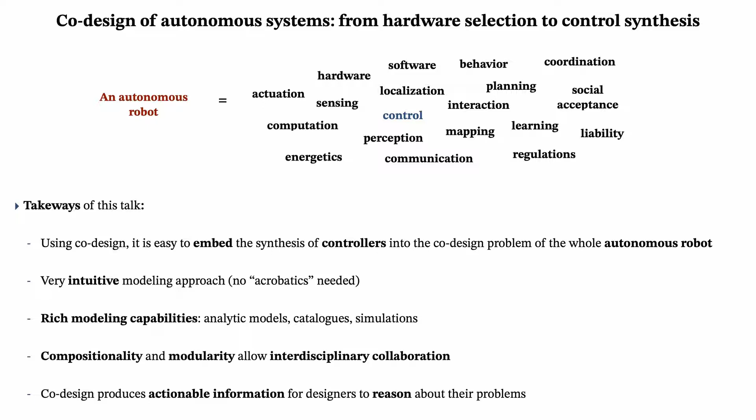Furthermore, the compositionality and modularity of the framework allow interdisciplinary collaboration and provide actionable information for designers to reason about their problems. The proposed approach is based on a monotone theory of co-design, which defines a design problem through three spaces. First, the implementation space, which represents the design choices, the options we have.

Second, the functionality space, which represents our objectives, what we need to achieve. And finally, the requirement space, which describes the resources we need to provide the functionalities. Typically, you can understand functionalities as something you want to maximize, and resources as something you want to minimize. In this framework, we model both spaces as partially ordered sets.

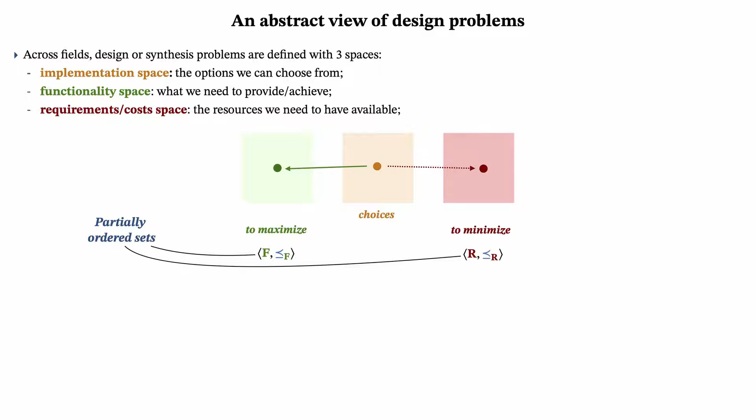Since this is not a common concept, let's first define partially ordered sets. A partially ordered set is a set P together with a partial order, which is defined as a reflexive, transitive, and antisymmetric relation. A typical example of partially ordered sets used in design are total orders. For instance, you might describe your energetic cost with the ordered positive reals, or the number of robots in your fleet with the ordered natural numbers.

However, posets give you a lot more flexibility than total orders. For instance, in this work we will use a partial order on positive semi-definite matrices. Consider two such matrices. First of all, we know that such matrices have real eigenvalues and can be therefore graphically understood as ellipsoids. We can define an order given by ellipsoid inclusion.

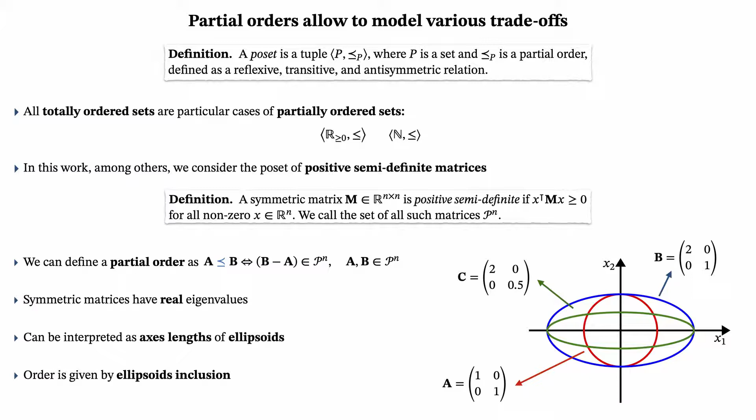A matrix A precedes a matrix B in the partial order if and only if B minus A is again a positive semi-definite matrix. In other words, A precedes B if the ellipsoid representing the matrix B contains the ellipsoid representing the matrix A. Now, given the knowledge of posets, we can formally define design problems with implementation.

These are composed by the functionalities and resources posets, F and R, the implementation space, I, and two maps, prov and req, mapping an implementation to the functionality it provides and the resources it requires. We represent design problems with implementation with the following formal graphical notation. Functionalities are green continuous wires on the left, and resources are dashed red wires on the right.

Implementations are hidden. Think, for instance, about the design problem of a battery. Functionalities are the capacity and the maximal provided current, and resources are the cost and the mass. Implementations, instead, are the different battery models which you can find on the market. Now, for the purpose of design, we need to know how something is done.

However, for the algorithmic solution of co-design problems, we will forget for a moment about implementations and focus on feasibility relations. A feasibility relation is a map from the product of the functionality space with inverted order and resources to bool, the poset containing only the elements false and true.

Each pair of functionalities and resources is mapped to true if there exists an implementation providing at least the requested functionality, requiring at most the proposed resources. This is a monotone map, since lowering the functionalities will not require more resources, and increasing the resources will not provide less functionalities.

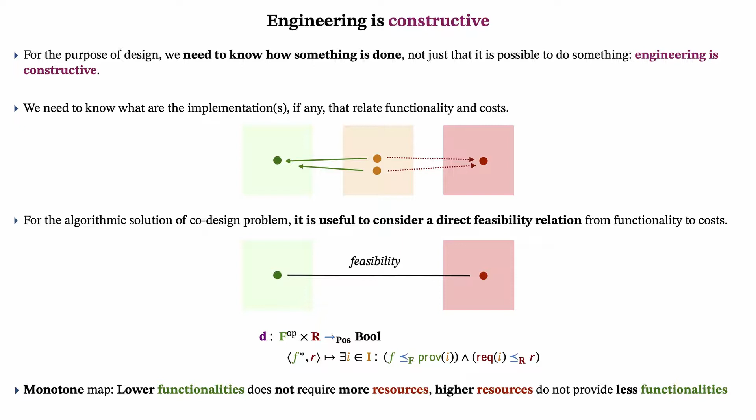The cool thing about feasibility relations is that we can compose them together in many ways. When composing design problems in series, the semantics is that the resources required by a first design problem are provided by a second design problem. Furthermore, we can have design problems in parallel, and we can model feedback when resources are fed back to become functionalities again. Finally, we can choose between two options, or ask two design problems to hold at the same time.

Interestingly, design problems are closed under composition, meaning that any of the mentioned compositions will return a design problem. This is a very useful tool when decomposing large problems into smaller subproblems, and will be very important when co-designing a whole robot. Now, given a composed co-design problem, there are two main queries we want to answer.

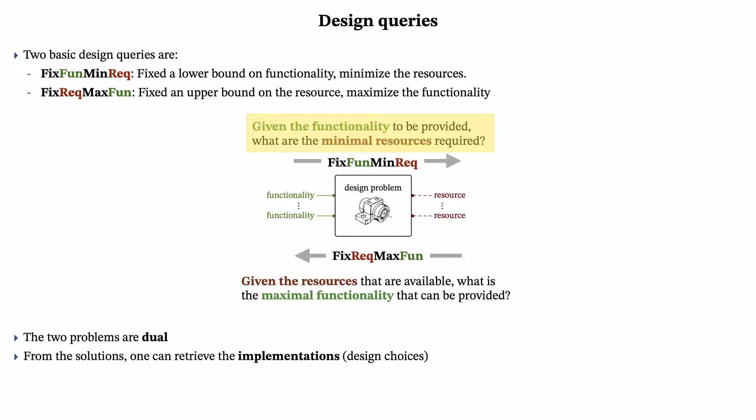First, by fixing the desired functionality, we want to find design choices minimizing the needed resources. Dually, we can fix the resources we can spend and maximize the functionalities we can get. In both cases, we can retrieve the optimal design solutions. We will now focus on the first query.

Technically, we are looking for a map H from the functionality space F to the upper set of feasible resources. Practically, this will be a map from the functionality space to anti-chains of minimal resources.

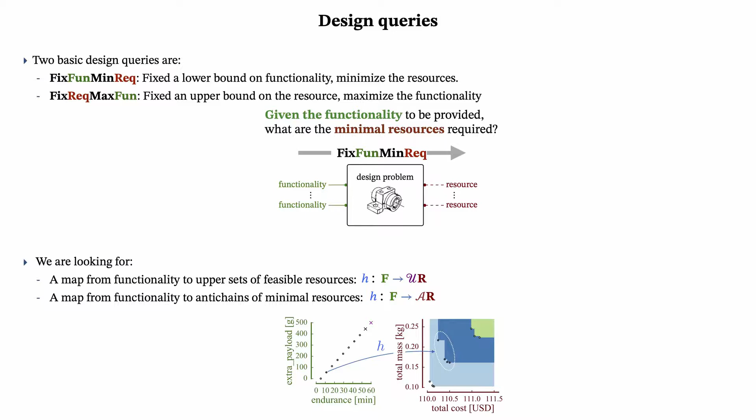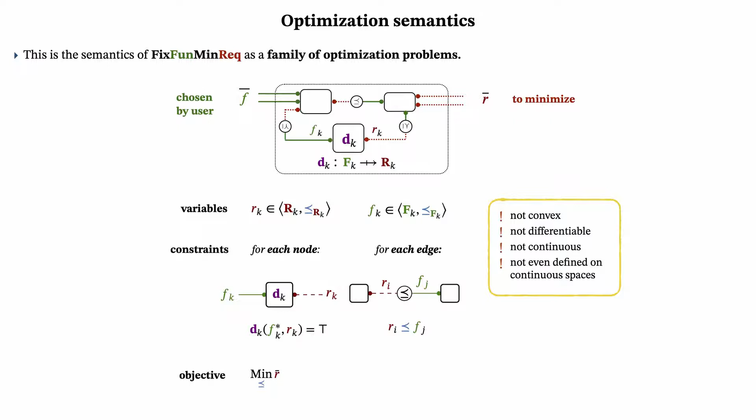We won't go into the details of the optimization, but we want to notice that the described query gives a family of optimization problems in which you have a functionality chosen by the user and you want to minimize the needed resources. Such problems are a particular case of multi-objective optimization problems, which are not convex or differentiable, not continuous, and not even defined on continuous spaces.

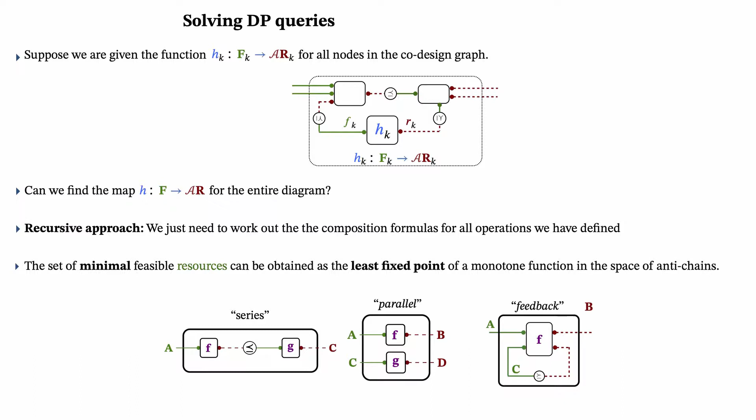Now, given the map H for each design problem composing a bigger co-design problem, we can recursively find a map H for the entire diagram, relying on the different composition operators. The minimal set of resources can be obtained as a least fixed point of a monotone map in the space of anti-chains. The introduced tools are now useful to describe the main result of this work.

In this complex diagram, you find the co-design problem of an autonomous robot. The formulation provided in this work allows us to include the design of a controller, which you see on the left, into the design problem of the whole system.

We instantiate the reasoning for the case of LQG control and provide modeling results for both the continuous and the discrete time cases. For the continuous time case, we consider standard stochastic dynamics with Brownian processes on the system and on the observations. We consider the classic infinite horizon LQG problem and recall the optimal control law, relying on the solution of two Riccati equations, one for the control and one for the estimation.

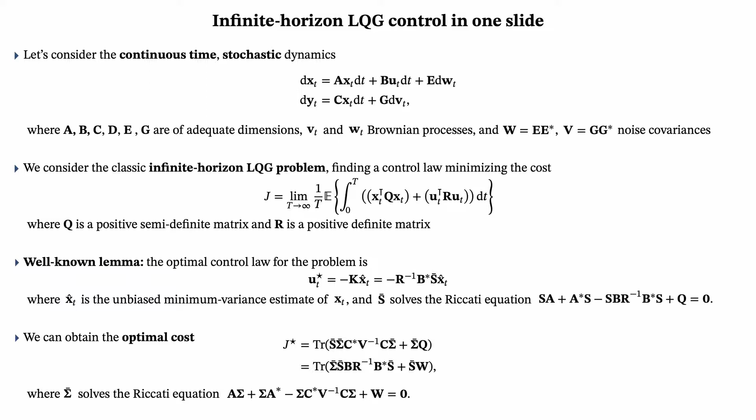Now, how is this useful to think about the control problem as a design problem? First, we split the usual LQG performance metrics describing tracking error and control effort. We call the new metrics p_track and p_effort.

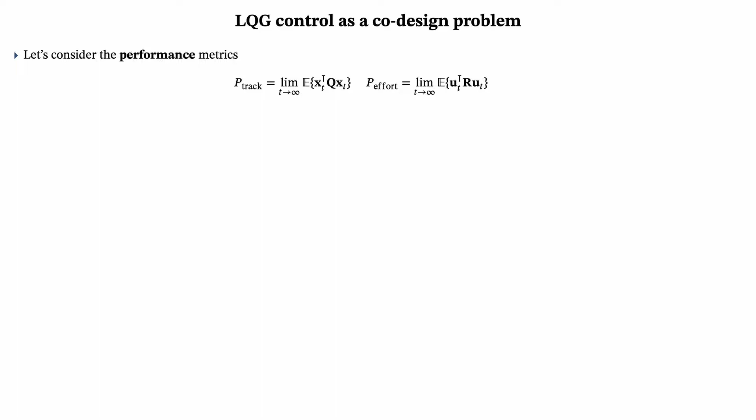Given this separation, we are now ready to state the first result of this work, which simply says that we can write the LQG problem as a design problem with observation noise and system noise as functionalities and tracking error and control effort as resources.

The monotone relation between the two is intuitive, and you can see this from the figure on the right. Being robust to higher observation and system noises will require equal or higher tracking error and control effort. We can prove this formally in 4 steps, using the partial order on matrices defined before.

First, we rewrite the performance metrics in explicit form, noticing that they depend on the solution of a particular Lyapunov equation. Second, we show the monotonicity of tracking error and control effort with respect to the weighting matrices Q and R for the LQG problem.

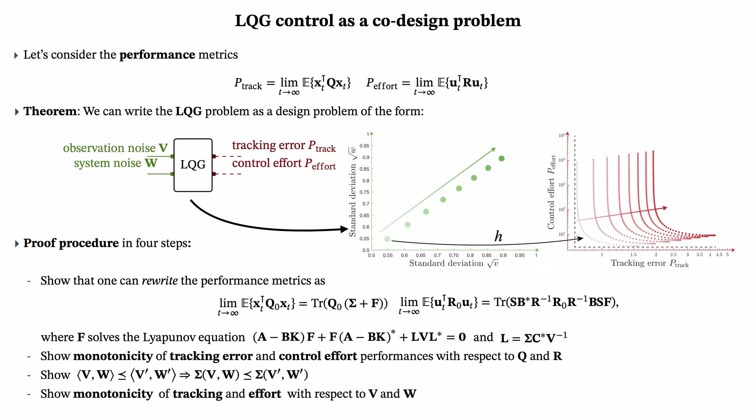Third, we show monotonicity of the solution of the Riccati equation for estimation with respect to the noise covariances V and W. Finally, we can show monotonicity of the performance metrics with respect to the noise covariances. This result can be further extended.

First, while staying in the continuous time domain, we can assume observation and computation delays, and we can embed them in the LQG design problems, considering them as functionalities. This can be done following what we call the substitution principle.

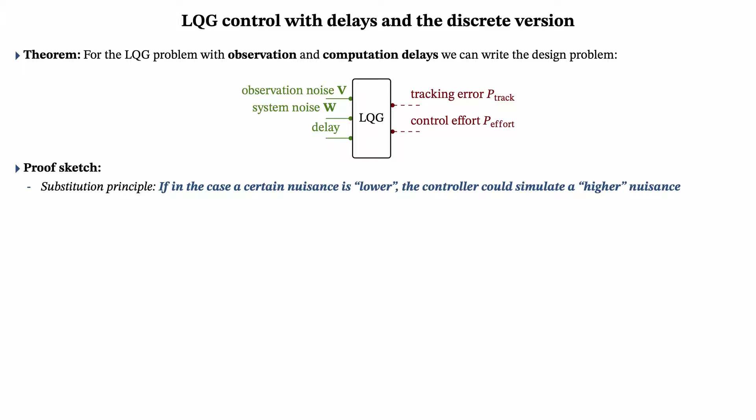In the case a certain nuisance is lower, or in other words, less impactful on the system, the controller can artificially simulate a higher nuisance. In this particular case, if I have small delays, I can very easily simulate higher ones.

Now, these results can be generalized to the discrete time case, in which we consider a sampling process, a discrete LQG controller, and a zero-order hold integration. In such systems, we possibly lose observations, and we model this via the so-called dropping probability.

With this new setting, we can write the LQG problem as a design problem very similar to the previous ones, now including the dropping probability as a functionality. Proving this result requires methodologies very similar to the previous ones, and you will find them in the paper.

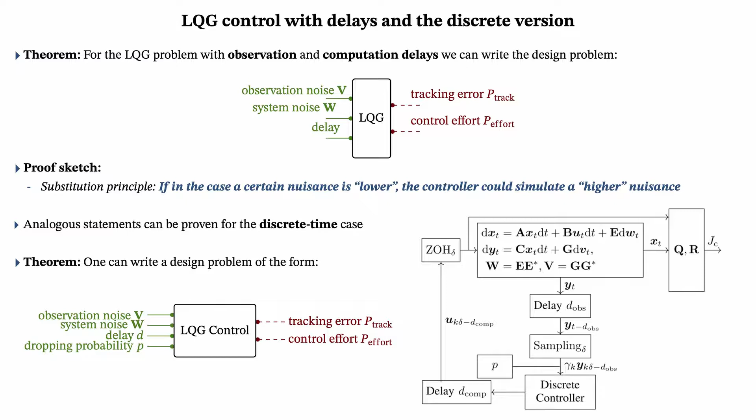Now, why did we do all of this? Well, given these results, we can naturally include the design of a controller, which is a very formal thing, into the co-design problem of a robot, which, given sensor measurements, needs to reach specific targets in space at specific times. This design problem involves more practical things, such as the choices of the batteries and of the sensors to be put on the robot, as well as the implementation of specific algorithms.

Let's have a quick look at this co-design diagram. Block number 1 represents the LQG problem, and the implementations are given by the solution of LQG problems for different parameters. Information to the control block is given by a feature extractor, which can be implemented by different algorithms, and which receives measurements from a vision sensor. The implementations for the latter are a catalog of sensors.

The objectives of the control action are dictated by a mission planning block, which lets the user choose the number of missions the drone has to accomplish and the time they need to last. Based on this information, actuators, batteries, and computer units need to be chosen from catalogs, and algorithms need to be implemented.

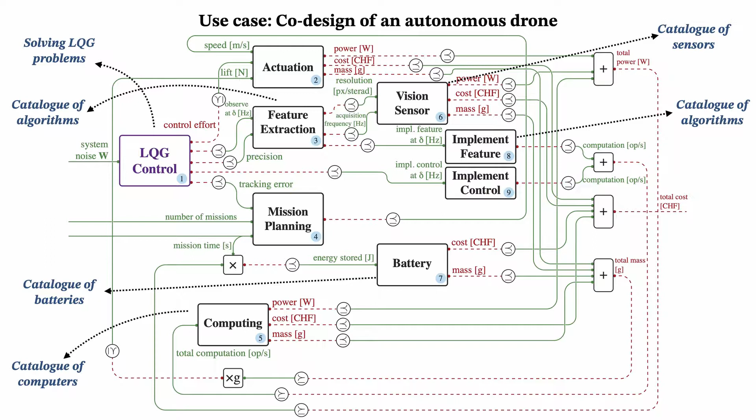Finally, you can notice how we are able to sum common resources, such as computation, costs, power, and mass, and how they contribute to the feedback loops, which represent the irreducible complexity of such co-design problems. Now, the interconnection of all these design problems forms a co-design problem, which we can solve with the introduced tools. We can then code these models with a formal language, which is very intuitive to use, and we can solve them using the MCDP solver.

We now look at the kind of solutions we can produce. By fixing some functionalities, here the number of missions and the mission time, we can produce Pareto fronts of solutions in terms of tracking error, power consumption, and costs. Given the complexity of the problem, we are not interested in providing a single optimal solution, but rather an informative anti-chain of optimal ones. For instance, you can notice that in order to achieve low tracking error, you will need to spend more energy and more money, and given these trade-offs, the user can decide where to stop on the curve.

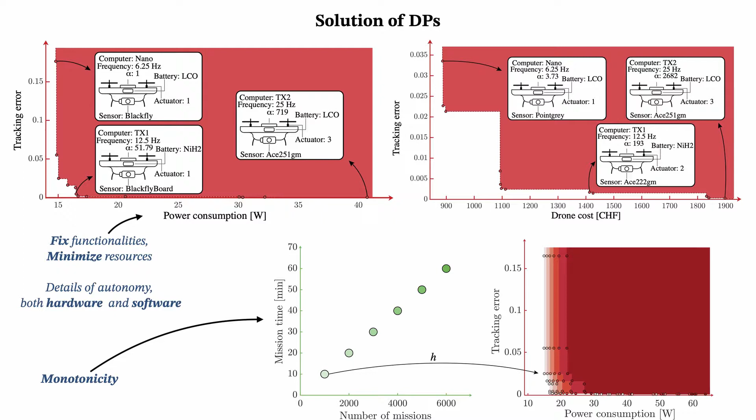Second, you can see that for each optimal solution, we can characterize the heterogeneous design choices by listing the chosen computer, the frequency and the details of the controller, the chosen battery, actuators, and sensors. Finally, I care about showing you the monotonicity graphically. In this picture, you can notice how increasing the desired functionalities, here again the number of missions and the duration of the missions, we can obtain dominating upper sets of feasible solutions.

Now, what are the takeaways? First, I've shown you that using co-design, it is very easy to embed the synthesis of controllers, here we used variations of LQG control problems, into the co-design problem of the whole autonomous robot. Second, I've shown you that this is a very intuitive modeling approach that does not require acrobatics as is common in optimization theory. This framework comes with an interpreter and a solver, which allows to easily model problems of interest.

Through the co-design of an autonomous robot, we discovered the rich modeling capabilities of co-design, including simulation-based, catalogs, and analytical-based models. Even if we did all of these models, this framework allows multiple users to co-design a system altogether, promoting interdisciplinarity. Finally, I gave you a taste of the kind of questions we can answer with this framework and the kind of actionable information we can produce for autonomous robot developers.

Now, of course, this is just the first step, and this is a very new theory. We would like in the future to showcase compositionality by including the co-design problem of this robot into the co-design problem of a fleet of robots. Second, we would like to generalize this modeling approach to other control structures, which include nonlinear controllers and also receding horizon controllers. Finally, we would like to exploit this framework to synthesize energy and computation-aware control strategies by exploiting the models representing computation, energetics, and control.